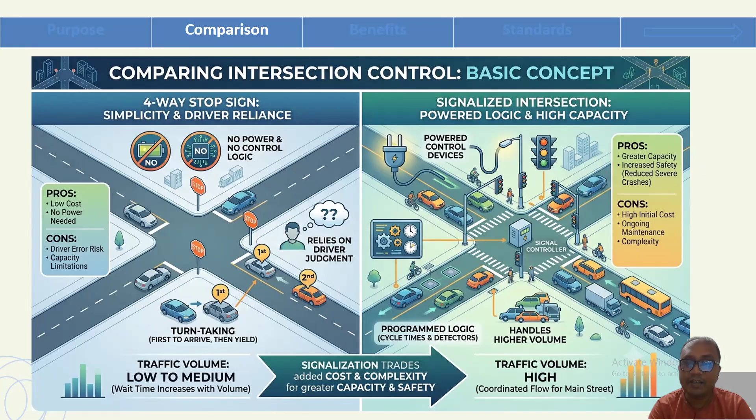Sometimes we need program logic. Obviously, we need program logic for signalized intersections. That program will be based on cycle time and detectors. We may use detectors, and obviously it is associated with high initial cost and maintenance cost as well.

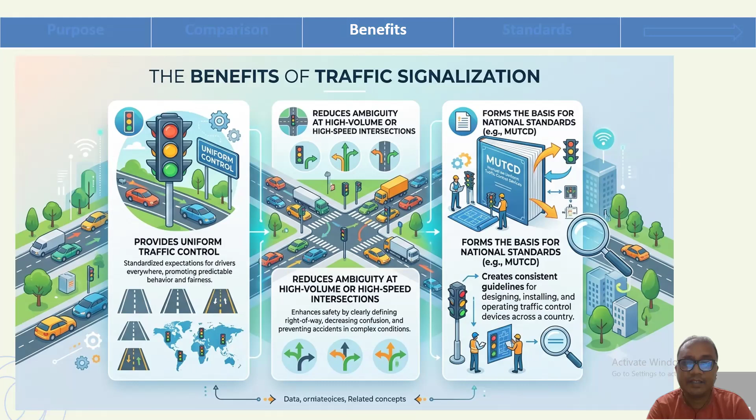And what is the benefit of traffic signals? Firstly, it provides uniform traffic control and reduces ambiguity where traffic volume is high and speed is high. And also we have to maintain some national standard. For example, in the US, they have the MUTCD, which is a national standard for designing, installing, and operating traffic control devices. So to make standardized traffic control, traffic signals can ensure this opportunity. And the MUTCD is the rule book in the US, that is the Manual on Uniform Traffic Control Devices.

And it defines standards for traffic signals, signs, markings, and warrants where a signal is justified, where traffic volume is a factor, or there is crash history. And obviously it will be based on data-driven criteria; safety decisions and data-driven decisions will have to be ensured. And we have to ensure consistency. That's why we need some sort of manuals which will be appropriate and consistent across all types of road.

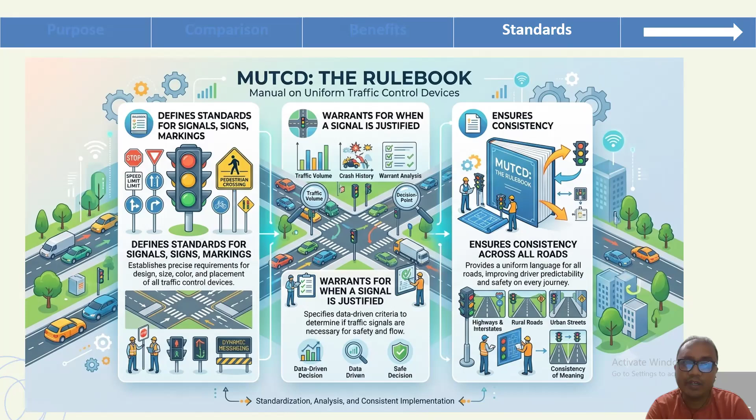Then comes the isolated intersection, which is standalone, mostly used on rural roads or highways, but also possible on urban streets. These are fixed time and can be actuated. Low traffic volume is commonly seen, and they are geographically separated from other signalized intersections. Local maintenance and simple traffic signal plan operation is observed for isolated intersections. However, on urban roads, we use coordinated signals.

On rural roads and highways, the challenges faced are reduced traffic efficiency and driver frustration, because sometimes there is low traffic and no traffic in one direction, but a red signal is raised. Also, there can be a tendency to increase accident risk due to rear-end or T-bone collisions caused by sudden stops at the signals, and there is no real-time adjustment, so it's a problem for isolated intersections.

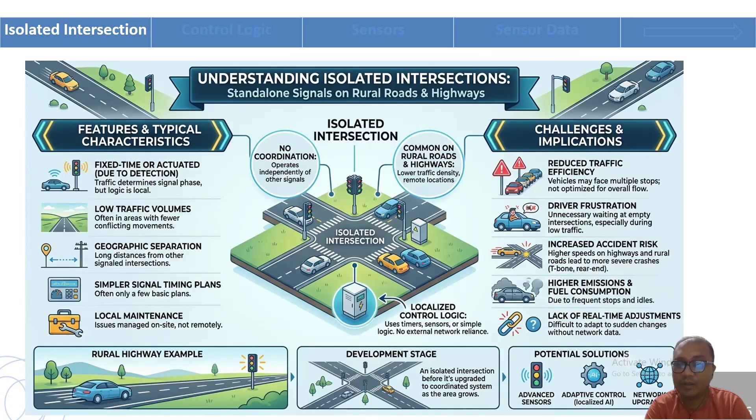So a potential solution can be to introduce advanced sensor adaptive control, localized AI, or network-wide upgrades. Then comes the control logic.

Control logic is the brain. In fixed time, we have fixed time schedules and historical traffic data. Those come in as input, and real-time traffic sensors such as vehicle detection, traffic flow, and congestion level also inform it. This logic works through sequencing and decision-making algorithms, also ensures safety protocols, then selects the decision logic, and the output for each approach will assign the green phase, yellow transition, and red phase. So our key benefits will be maximized efficiency, ensured safety, dynamic adjustment for traffic, and responsiveness to pedestrians.

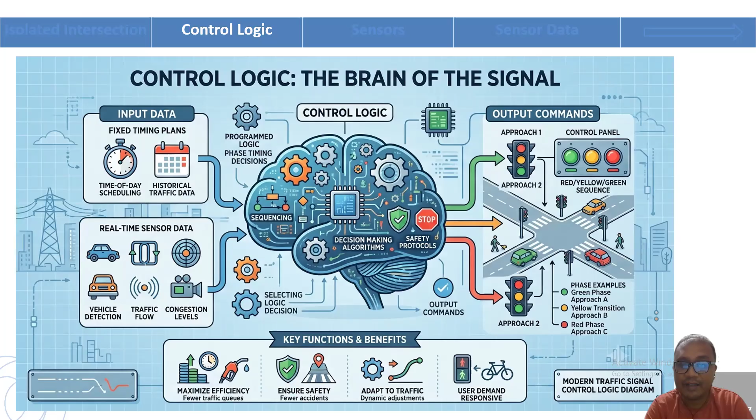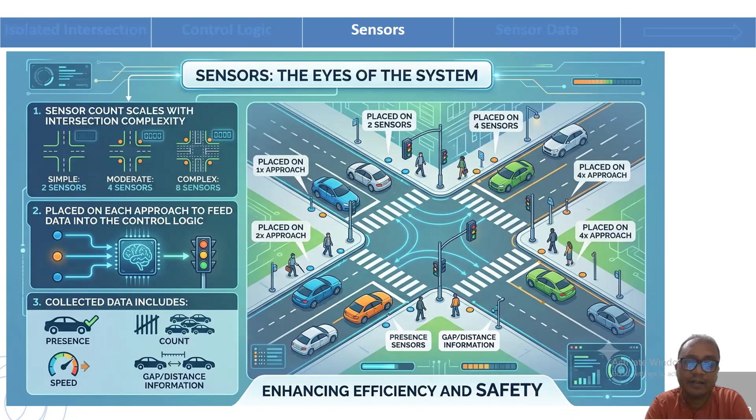Then comes the sensor. Sensors are the eyes of the system. There can be a 2-sensor system, 4 sensors, or 8 sensors, placed in each approach to feed data into the control logic. Mostly they are used to count the presence of vehicles, or can also measure speed and gaps, utilizing gap and distance information. We can see the sensors located at the different approaches of an intersection.

Then comes the smart traffic control and sensor placing strategies. We need to optimize sensor placement and upstream positioning. Consider the upstream positioning of the sensor to detect the traffic flow, then decide where to place it. It can be short, at the stop bar, or for the advanced warning.

What type of information we need from the sensor, that is a main issue. Further distance offers more advanced warning for control logic. So control logic and location and placement of sensors is important here.

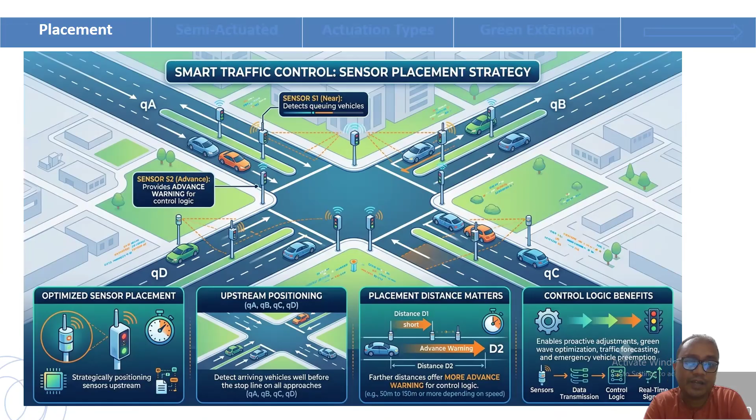So to enable proactive adjustment, green wave optimization, traffic forecasting, and emergency vehicle preemption, we need sensor data transmission, control logic, and real-time signals to feed into those information. It will detect the queues, and also the advanced warning system can get information to feed into the signals.

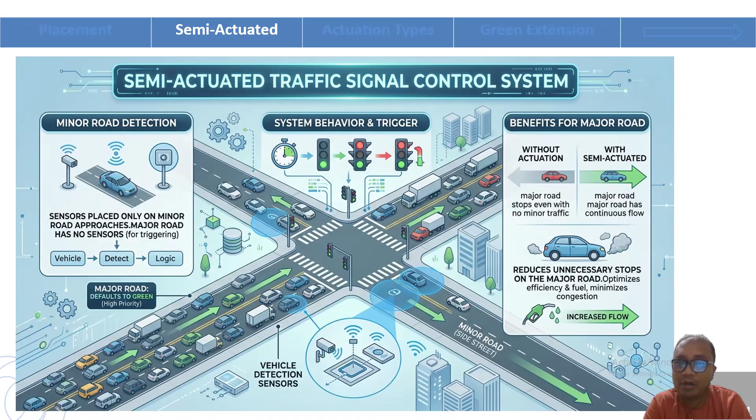So with semi-actuation, the major road has continuous flow. Without actuation, the major road has to stop due to minor traffic. So this is the problem. Also, fuel consumption and unnecessary stops in the major road will be increased without a semi-actuated traffic signal.

Let's see the comparison of traffic signal controllers. We have fixed time traffic signals, semi-actuated traffic signals, and fully actuated traffic signals. Fixed time traffic signals: the phase, cycle length, green split is fixed, and sequencing is also fixed. So it may cause unnecessary delay during light traffic and congestion during heavy traffic.

Semi-actuated traffic signal gives priority to the major road, especially the one approach, reduces delay in the main road, and maintains minimum green time for the minor or side road. Fully actuated traffic control is possible where we have sensors in all roads. It maximizes overall efficiency of the intersection, adjusts green time dynamically, and maximizes the flow.

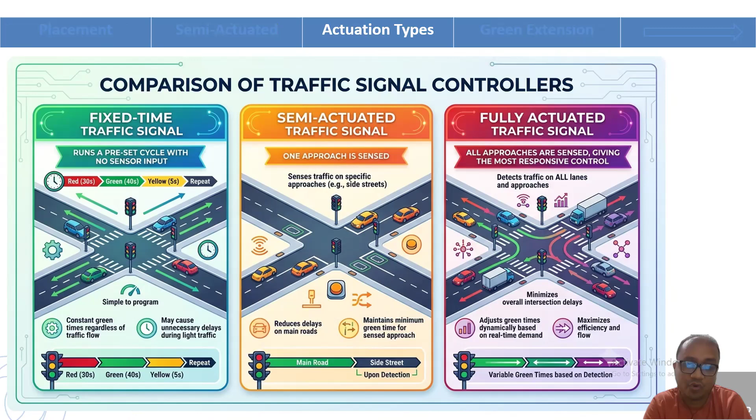Next comes the topic about estimating arrival time and extending green, vehicle detection and logic. That control logic uses sensors, and real-time speed and position are measured. Then, based on that, it detects the approach and lane occupancy. Then arrival time will be estimated, when the vehicle will come to the intersection.

Using that information, or calculating it using a mathematical formula, we can adjust the signal, and green time can be dynamically extended, and it prevents the stop. So its advantage is it reduces unnecessary stops and improves delay and safety as well.

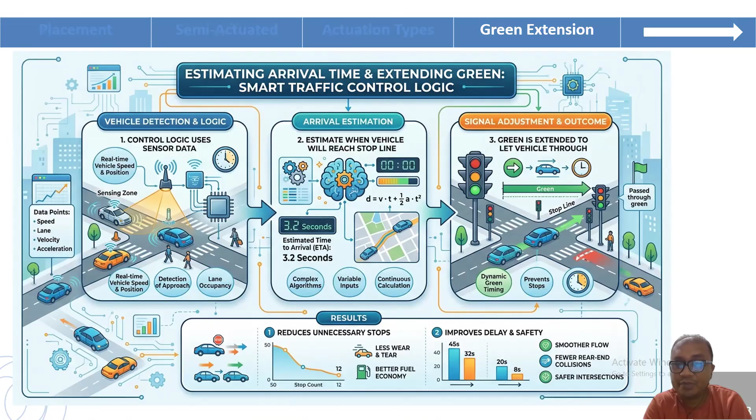So if we look at the cost of stopping and the power of extension, we can see that stopping harms, and extending green ensures passing without stopping. So cost of stopping: if we have frequent stops, then waiting time will increase. Risk of rear-end collision will be increased, and there is also emission and fuel wastage. Emission will be more and fuel wastage will occur.

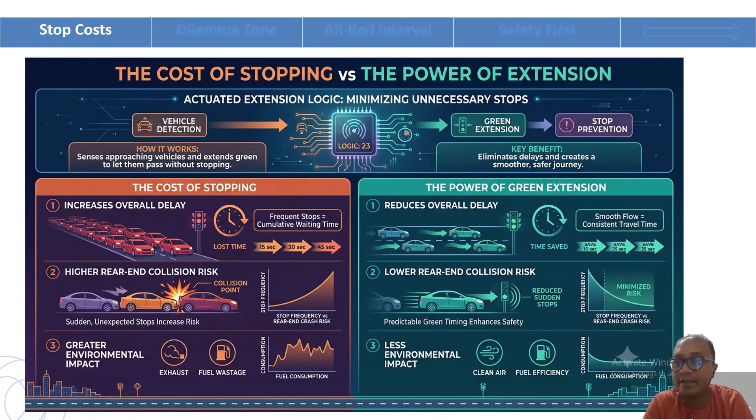And the power of green extension: if we can extend the green, then it will ensure smooth traffic, reduce delay, lower risk of rear-end collision, and less fuel consumption, ensuring clean air indirectly.

And let's now talk about the dilemma zone, which is related to the yellow interval. The dilemma zone is the zone near the intersection where drivers are not sure or face confusion near a stop line whether to stop. Neither safely stop nor safely clear. So in that position the driver can neither safely stop nor safely clear.

So to tackle the dilemma zone and mismatch, we ensure at least 4 seconds, sometimes use 3 seconds. We calculate the yellow interval. And it's not flat actually. The yellow interval is related to the vehicle speed on the approach,

and yellow timing is required because it can minimize the dilemma zone, because if the dilemma zone is long, it's not safe for vehicles, and it reduces rear-end collisions, prevents red light running, and calibrates to vehicle performance as well.

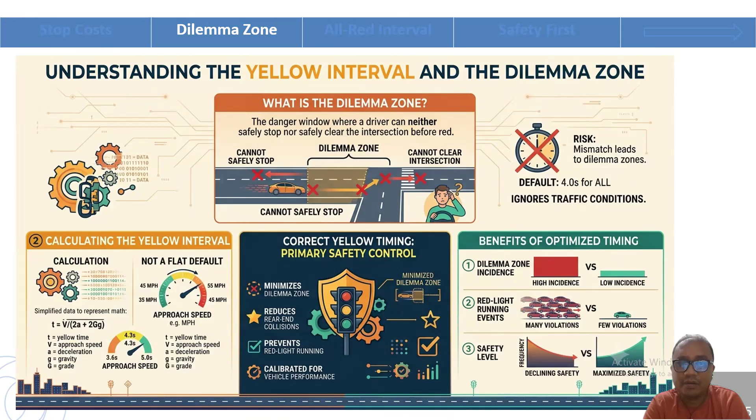So the benefit of optimized yellow light timing is dilemma zone incidents will be reduced, red light running events will be reduced, safety will be maximized, and frequency of stopping at the intersection will be reduced.

Then comes the all-red interval to clear. So in the incoming approach, we use yellow or red. So the cross street waits for green and the main street clears in the red or yellow. But when we use an all-red clearance interval, it can be 1 to 3 seconds.

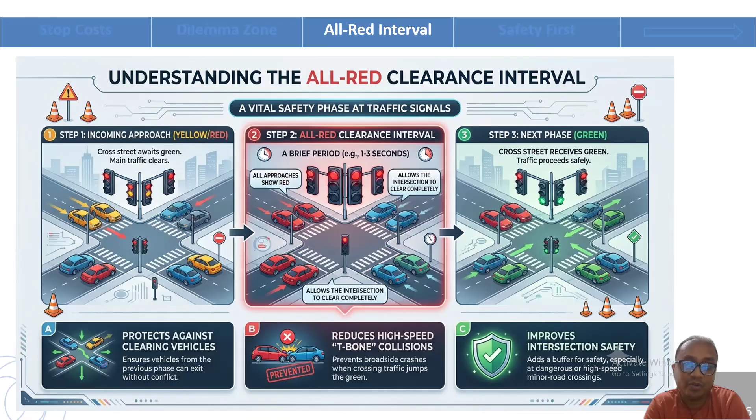All approaches should show red, allowing the intersection to clear completely. So after the all red, one phase will show green and traffic can proceed on one crossroad. It protects against clearing vehicles. Vehicles which cannot pass in the yellow phase are protected, the tendency of T-bone collisions is reduced, and overall intersection safety is ensured, because this is a buffer for traffic safety, and especially for high speed minor road crossings, it ensures vehicle clearance.

So safety is one of the core issues of signal timing strategies. We have to assign yellow signal timing so that our dilemma zone will be reduced and decision zone will be increased, and an all red clearance interval has to be provided, so that it protects lagging vehicles from previous greens and ensures overall full clearing.

Then signal actuation with logic. We have to use detectors, and detectors will be connected with the vehicles, which will be demand responsive. So overall, all these things ensure higher efficiency and lower total wait time, minimizing delay. We have to buffer less while driving and reduce conflict and its risk. So safety first, balancing with the delay, because we have to assign yellow and all red, a small amount of it, to maximize safety. So overall, human life and safety is also concerned with intersection delay.

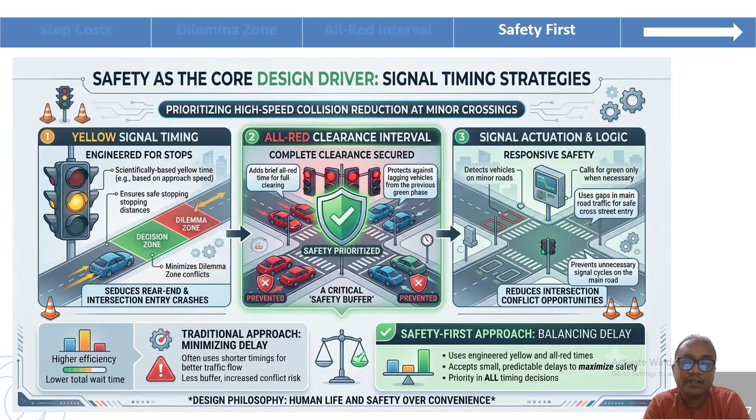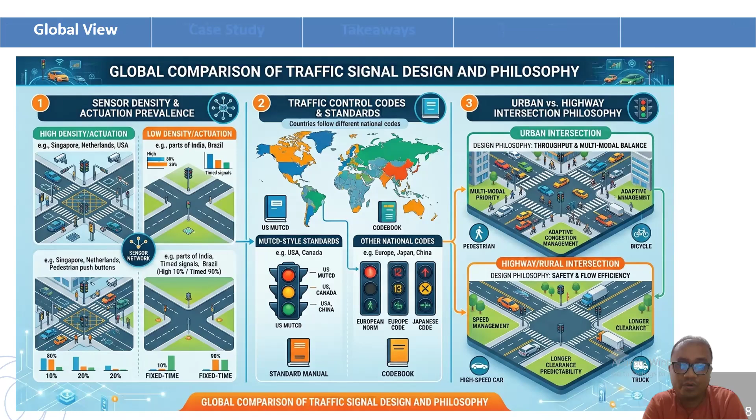Urban versus highway intersection philosophy. For the urban intersection, we have to ensure throughput and multimodal balance, also adaptive management, managing congestion, and multimodal priority is a concern. But for highway and rural intersections, safety and flow efficiency we have to consider. And the best part is that longer clearance, speed management, and predictability you have to take into account for highway and rural intersections.

We can see a case study for a real isolated intersection control system, where we can see the stop bar presence, traffic signal head, and detectors which can recall the minor road approach and the major road. It will feed into the actuation logic where sensors are located in the major and minor streets, and a pedestrian push button also ensures gap timing for the major road. Minimum green will be ensured to the major road, and clearance and maximum green limits are assigned. Yellow will be changed to red clearance, and lastly the signal state output will give the green signal to the minor road or major road, keeping the minor road green while the major road holds using yellow and red.

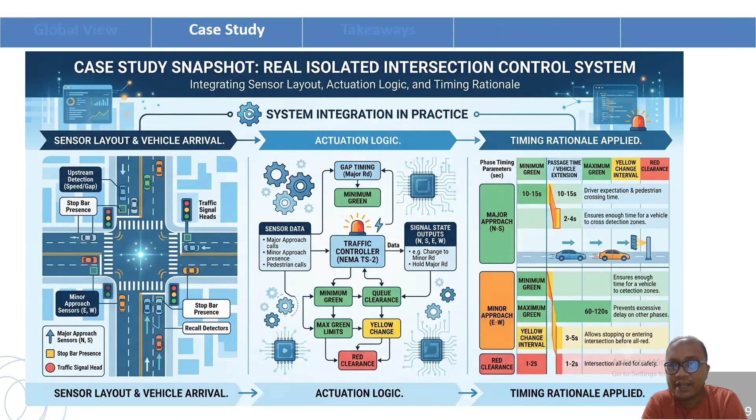So we can see that the minimum green time for the major road is sometimes 10 to 15 seconds, and red clearance is given 1 to 2 seconds. Passage time or vehicle extension can be 2 to 4 seconds. And for the minor approach, the maximum green time is sometimes given 60 to 120 seconds, and the yellow change interval is usually 3 to 5 seconds. It allows stopping or entering the intersection before all red. We can see the timing rationale applied to a signalized intersection. This is the best part of this slide.

Then comes the takeaway of this study. Traffic signal control replaces the judgment of drivers: stop sign judgment versus program logic. Sensors enable real-time data, and with loop detectors or video detectors, real-time vehicle counts are possible, and they feed into the database to get control logic. Timing decisions resolve safety risks. We have to think about the dilemma zone. Yellow interval and all red clearance solve the stop and go decision and intersection occupancy.

With green, we can ensure green extension. Using green extension, we can reduce rear end risk. And for every timing decision, yellow interval, all red, green extension, overall it will ensure safety parameters, vehicle clearance, and collision prevention. So that's it all about.